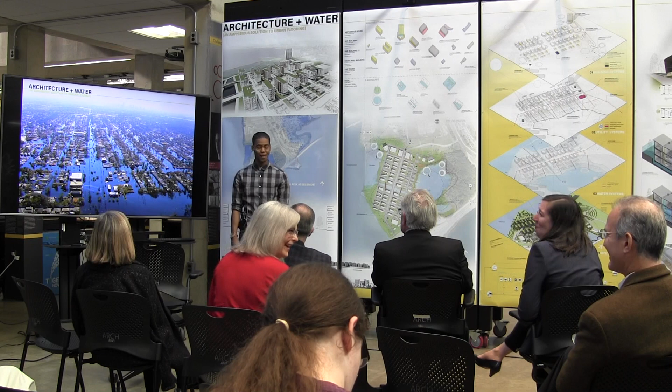So starting, my thesis is Architecture and Water: an amphibious solution to urban flooding.

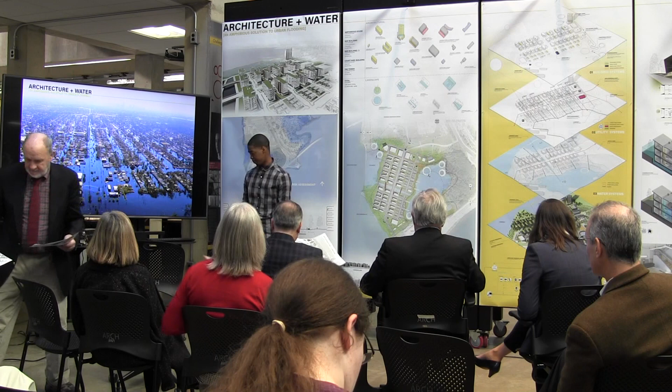Designs of a purely arbitrary nature cannot be expected to last long. This is a quote by Kenzo Tange, a prominent figure within the metabolist movement, and a key principle of how I approached my own design. Architectural permanence is very important, not only to the architect, but to the people who live in the buildings that we design.

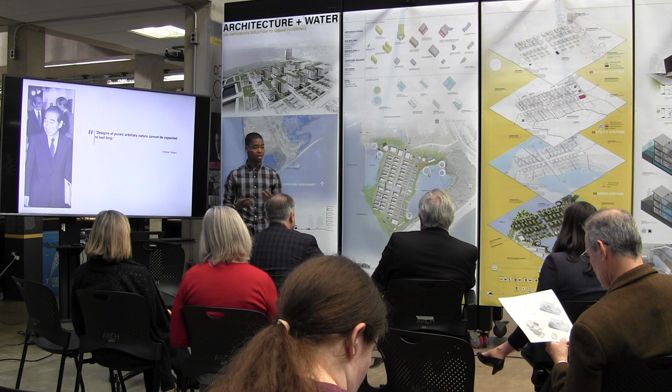One of the key problems that our architectural permanence faces is water. Water, when it's introduced to a building, can lead to mold, sickness, and structural instability. But it's also one that we are starting to find happening more often due to climate change. We often build buildings so that we can deal with this water and architecture duality.

So we build roofs to protect ourselves from water. We build downspouts to move water away from a building. But these problems are becoming more and more apparent due to climate change. Climate change is very real. It's happening, even though some people deny it. And it's causing too much water in some areas and too little water in others.

Climate change is causing sea level rise and flooding, but it's also causing things like the water crisis in Africa and other places, like specifically Cape Town, where they've limited the water supply on a daily basis for residents.

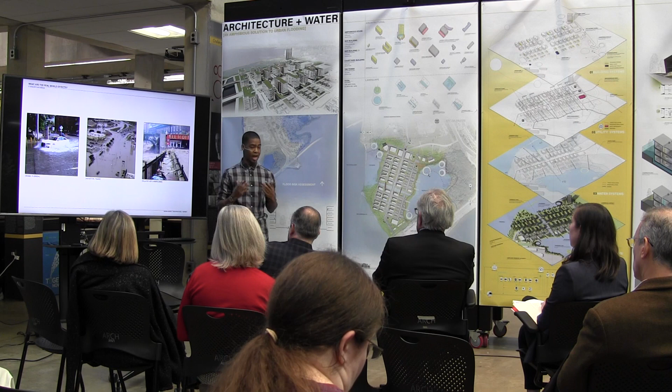They've started to raise elevations, invest in their wetlands and other pumping infrastructure. But that's not the only problem. In places like Houston, Texas, and Ellicott City, they're seeing flooding due to poor planning design, which is the cause of lack of permeability. And these effects are compounded by pollution, which mixes with the water and affects the entire water supply.

So we get these problems because we build close to water, but why do we build close? We build close because access equals value. When we build close to water, we have done so traditionally because of defense, mercantilism, activity, swimming, and all of these things. But the problem is that with sea level rise, we're getting more flooding, more storm surges, and more pollution.

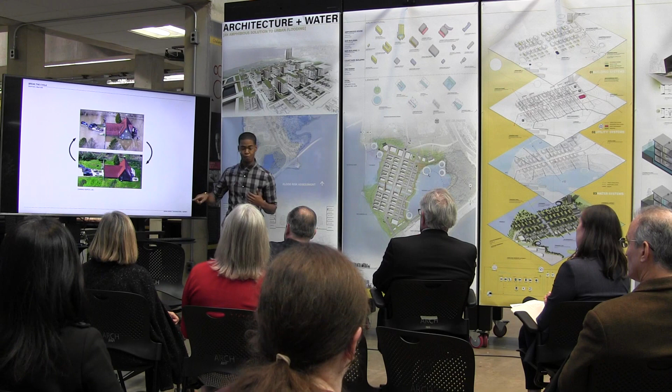Traditionally, what we've done is one of two things: rebuild or set back. We've run away from our problems, basically. So this thesis encourages the idea that perhaps one solution to these problems is creating efforts that foster resiliency and staying on these landscapes, embracing the positive aspects of water. Instead of this cycle of rebuild and rebuild and rebuild, we want to break that cycle, because these are solutions that aren't expected to last long.

Looking at a group of people who did attempt to solve some of these problems in one aspect or another, the metabolists who came out of the 1950s CIAM conference were led by Kenzo Tange, who I spoke about earlier, and they created these megastructures. This is the Tokyo Bay plan. They created megastructures that extended over Tokyo Bay, with plug-in modules attached to them, and civic buildings that ran through the center.

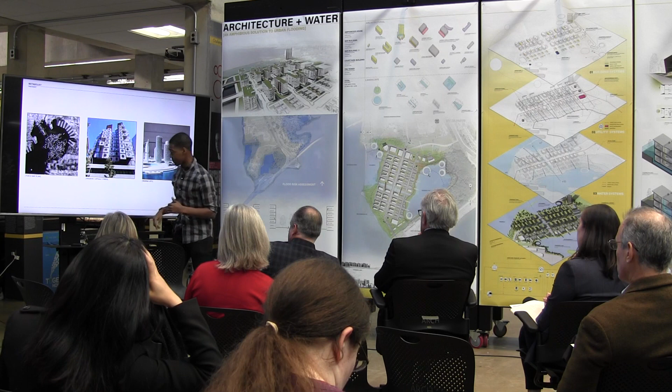Their probably most prominent design was the Nakagin Capsule Tower by Kurokawa. It saw the megastructure as the core space, with stairs and elevators running through the center and plug-in residential modules. The Marine City was an extension of the Tokyo Bay plan, in which we also saw vertical towers of modularity with inner rings and outer rings that dealt with water differently, some for activity and some for fishing.

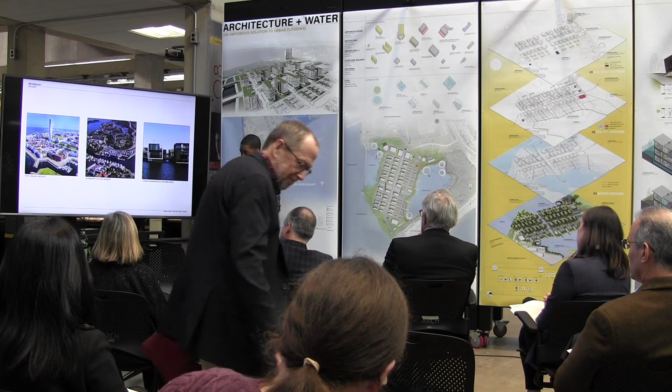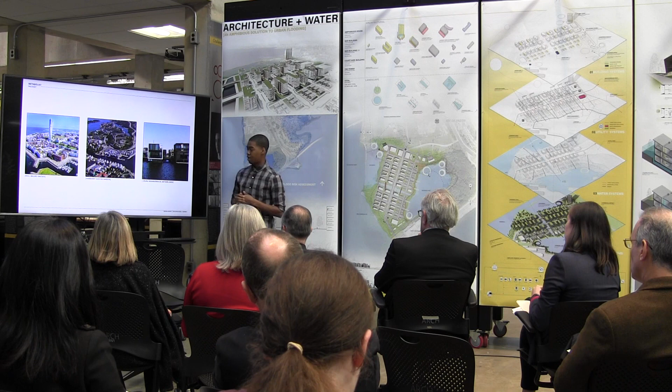Another group that's dealing with water in interesting ways are the Northern Europeans. The BO01 project in Malmo dealt with it interestingly by bringing water into the site and using it to foster sustainability. Hammarby in Sweden uses a cool waste management system of chutes to transfer waste, and IJburg in the Netherlands dealt with this at a neighborhood scale.

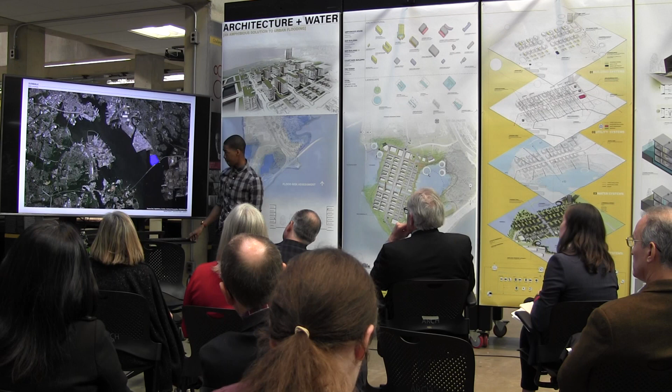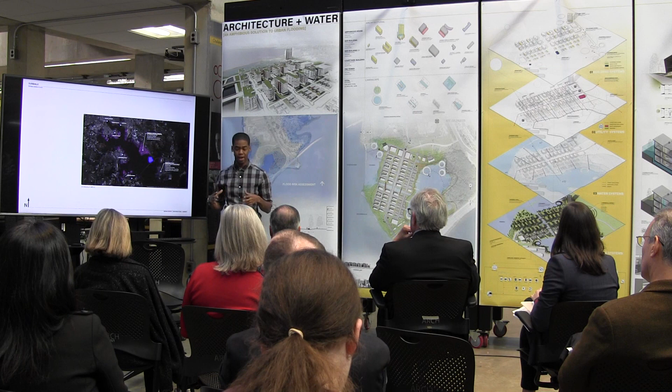So if you're looking at this, this is Baltimore. It's adjacent to the Dundalk Marine Terminal, which does 40 containers per hour and is one of the largest in Maryland. And Sparrows Point, which is set to bring in $2.9 billion in economic growth to the area through things like Amazon has a location there, and cars, and it's set to bring in over 17,000 jobs to the area.

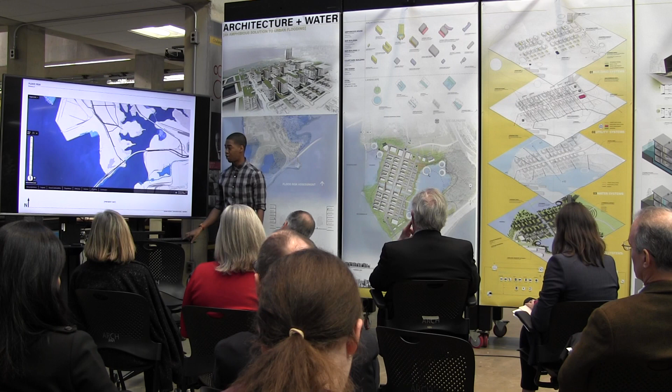But it's also dealing with a lot of flooding. So presently, it's fine. There's a neighborhood to the north of it, but over time, by 2100, it's set to take on about 5 feet of incoming sea level rise, and this will start to flood adjacent neighborhoods and the site itself.

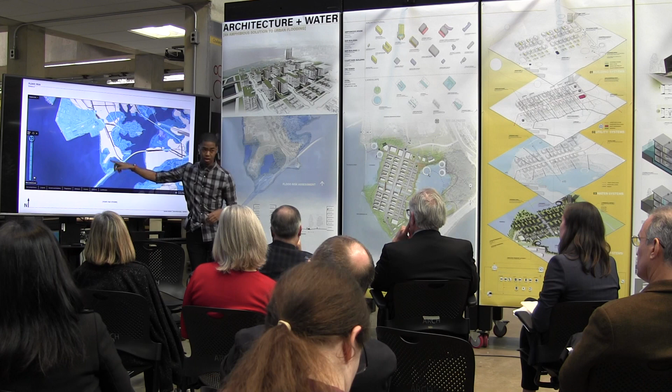By 2100, we're set to have at least one storm that will leave 10 feet of sea level rise to the area, taking over the entire site and leaving merely a spine. So this once again is the site, in context.

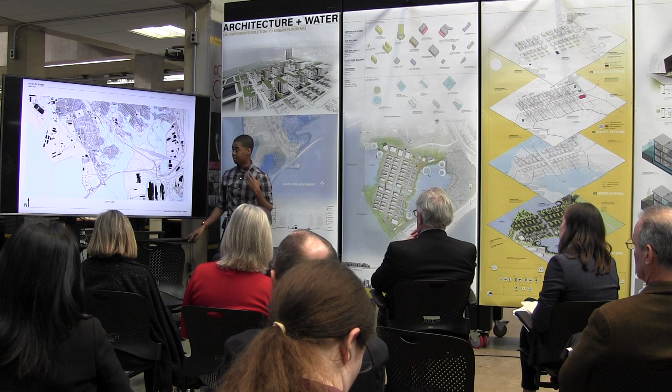When thinking about the site, I developed key ideas addressing how to design on the site and what I thought this thesis should be about. So the goals of this thesis were: one, to provide a safe space for people to live and thrive in flood conditions; two, creating infrastructure and water-sensitive urban design; and three, show the community how they intersect with the ecological system.

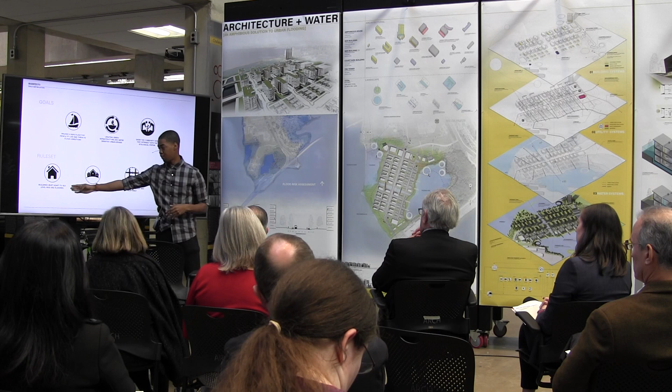To do so, I created a rule set, which is my manifesto. One, that buildings must adapt to sea level rise and flooding. Two, that landscape and architecture are one and the same. Three, that buildings are modular and adaptable. And four, that the building technology should facilitate these changes.

So with that being said, I'll take you through the boards and run you through some of how this design came to fruition. So this is the site and its flooding context.

It has one street, Breckenridge Drive, that connects it, and I-695, which runs through the Key Bridge. And so otherwise, it's generally isolated from other contexts.

When thinking about this design, I separated the goals into a kit of parts, much like the Metabolists did, to create a system that works. So I developed a system of buildings, architectural and landscape, that work in tandem with one another. Thank you.

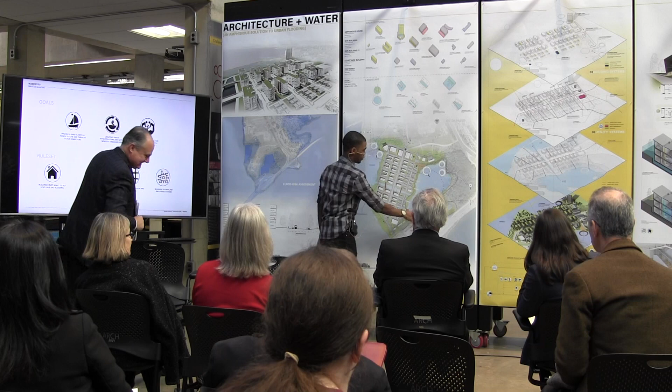So these all operate under the guise of an entire plan, which is 45 acres. So there's Riverside Lake here and a marsh here with a canal that runs through. And so the general areas are a commercial district coming in off of Breckenridge Drive.

You enter through a gateway. So there's two shopping areas here, you can see them in red up there, that flank the gateway and entry to the main site. Flanking that would be the large tower, which is the landmark of the site, and then high density towards the marsh area, and low density amphibious housing towards the Riverside Lake.

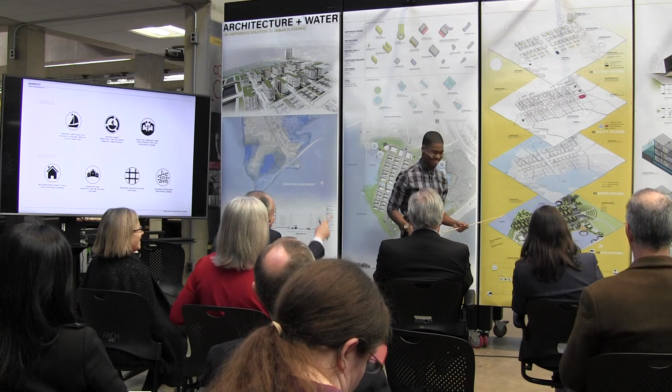So when thinking about the site and how these buildings, when thinking about the kit of parts, I thought about how they play into a system, much like the Metabolists. I developed a water system, which is based off of the typical evaporation, condensation, precipitation, and then collection. But then that feeds into the entire loop, which becomes the man-made cycle of collection and then cleaning into potable water, and then how individual systems within the building context work.

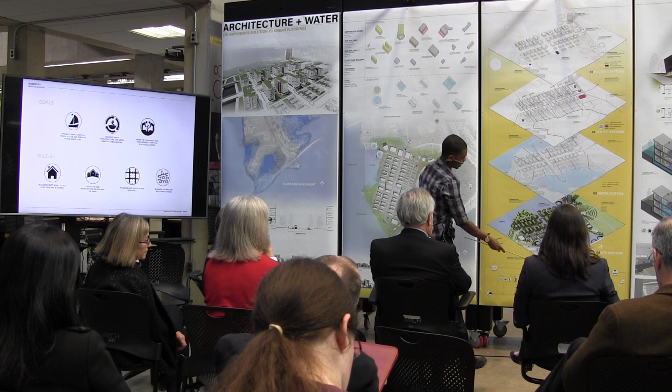So that would be how energy systems feed into other water systems, like, for example, an aquaponics center, which would have worms feed fish, have those fish be able to be sold, or how those fish end up providing for vegetables, and they can be sold as well. So that happens within what I call baths, which are akin to the harbor baths, and they are almost a fishbowl within a fishbowl of sustainable features that are included because of the isolation of the site.

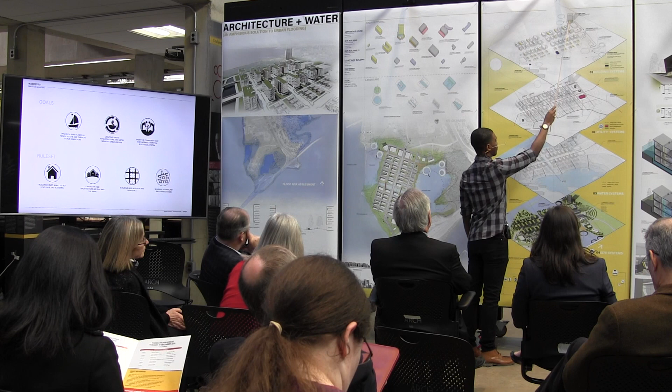So going to the building systems, I thought of how these buildings were in tandem with one another to collect water and to transport water from one area to another. The tower has a growing space with a pink lab that feeds into the gateway, and then the baths feed into an aquaponics center, which also feeds into the gateway.

Pump building facilities transfer water from the riverside lake into the marsh during heavy storms.

For utility systems, there's greenways that run south to north on the site, and it's treated very much like a garden city in the essence that private throughways go through the center, whereas public service ways happen on the exterior of the buildings. So this would be a public service way, whereas this would be private circulation.

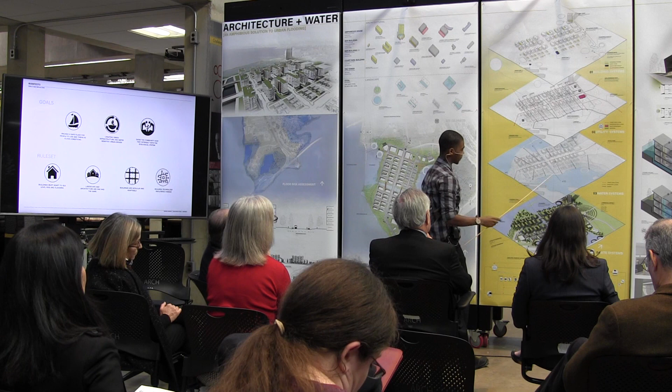Breckenridge Drive stays on the primary spine of the site and won't flood, whereas the others will. And this allows for flow from the Riverside Lake to the marsh area.

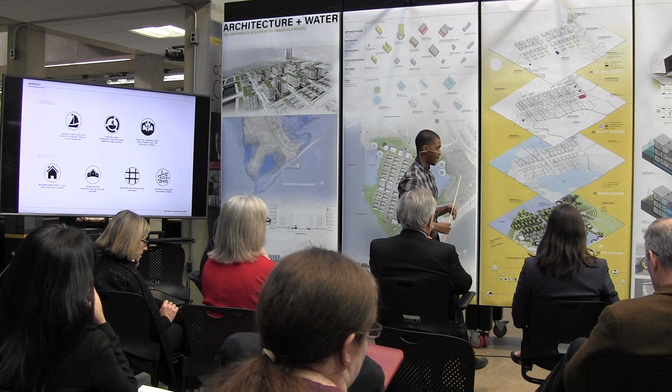The flow of water is very important to the site because it's about keeping the water moving rather than stagnant, because that's when you get problems with pollution and brackish water. So this led to allowing the creation of a boardwalk which runs through the site and provides activity and amenities along the lakeside.

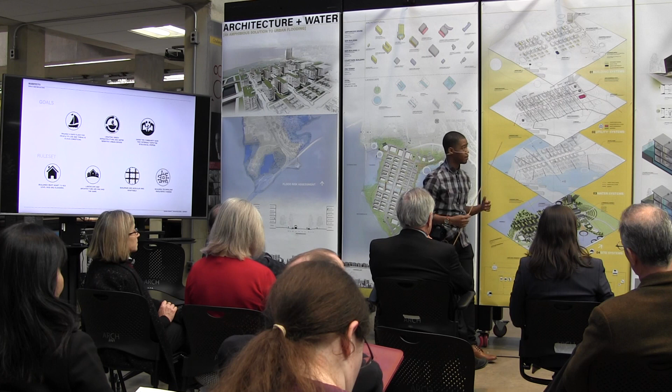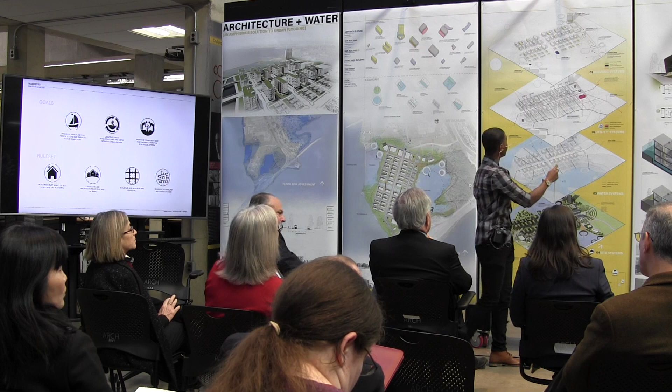Now we'll talk about the four scales of residential that I've looked into. So the first being the Amphibious House, which are here and along here.

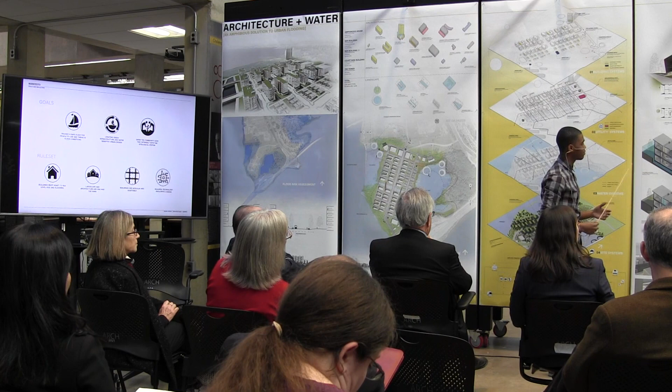So I looked at a precedent in Thames, and it dealt with using waffle slab construction to allow the building to lift over time. This contains a two-story unit and a one-story unit. So the ground floor repeats and is below, and this is one unit.

So this allows it to float. The waffle slab allows it to float during high flood periods, and there's a bridge, which is basically a sculptural transition space that allows for transition in flood periods to safety. Thank you.

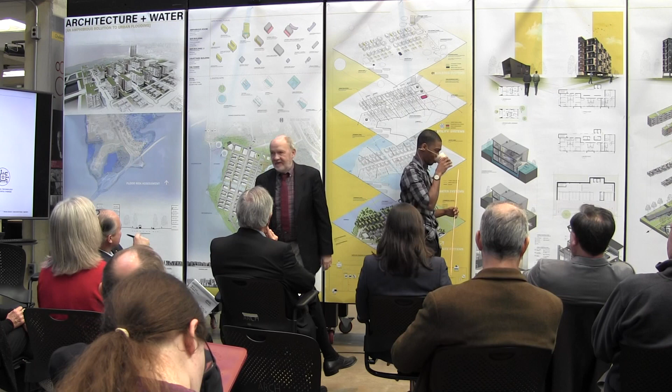Seems appropriate. It is. Getting dry up here. Get you through this.

This is a look at the interior space coming in through the living room, and the core is mainly all of the water features, and it's outbounded by a master bed and a study, which gets you outside, and a kitchen.

Then looking at the bar building, it starts a continuity of using shipping containers as a module, so it uses either 20-foot deep by 8 feet shipping containers or 40-foot length shipping containers. So that would happen, the 40-foot would happen there, whereas the 20-foot would happen here.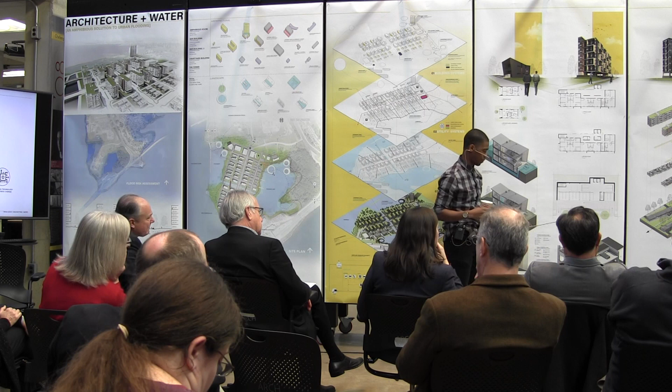And that allowed for creating this idea of modularity within the space. And it also allowed for a water unit where everything is compiled. So because this deals with water, the sink runs to the toilet, and then the toilet washes out the bathtub, or the dryer or the washer machine can run out to the sink and wash that out.

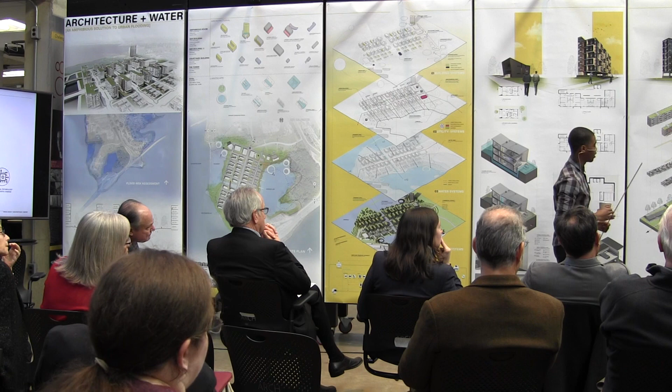Looking at the Courtyard Building, I thought back to Greenbelt and kind of this end facility. So you see these courtyard buildings running on the outside along the marsh. I thought of it as that Greenbelt where I'm redirecting and funneling views and pedestrians into a gathering space and looking outwards towards the marsh, where there's parking below, once again like the bar building.

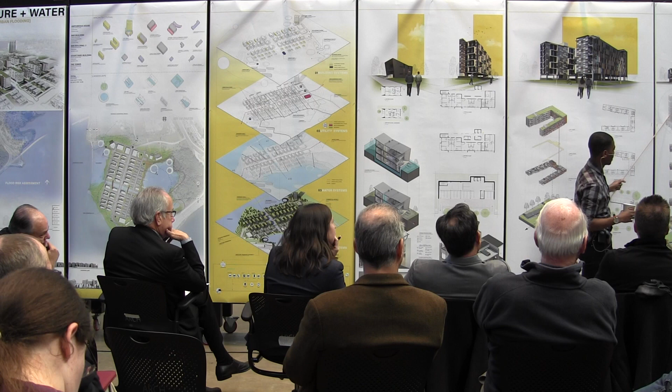And finally the tower, it has these grow spaces that happen within each tier. You can see it here, here, here, and there's one outside that all bring water in from the roof through hydroponic space columns that allow for growing, and that water is collected into tanks, and the growing material that the vegetables or what have you that's grown can be transported to the gateway tower.

So looking at entry, when looking at the building, I began to skew the main tower facade outward so that you can look outwards towards the water and everybody gets a view towards the water, much like this, fostering this idea of a garden city and public views.

And then on the lower levels, I created a modular system of units that could be used as vending spots that can turn to open or close. When they're turned one way, they allow for people to enter them, and when they're turned the other way, they're closed off to the site.

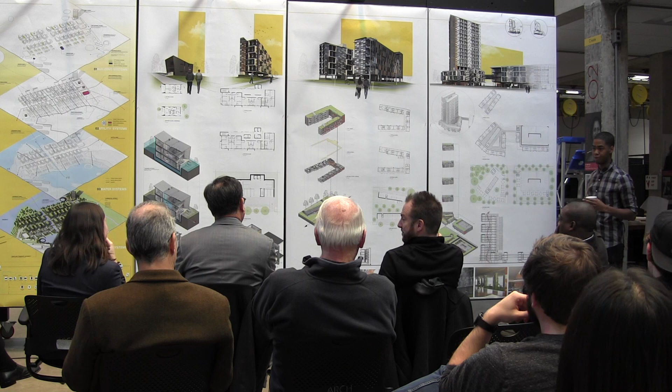So I'll open it up to questions, concerns.

A couple things. Is this on? No. Here comes help. Test. Technology. Test. Oh, it works. Test.

I went to school here a long time ago, and when I left, I felt like I had to go back to school. Not that anything was wrong here, but I did so because I thought, at least from my way of seeing the world at that point, the issue for my generation was urbanism, contextualism, understanding how modern architecture had failed us in that way.

And I think this is the issue for your generation. I think anybody who enters this profession at this point and doesn't realize it's about things like this is really not understanding what the world is about. So I think it's a really good thing that you took this on.

My understanding of your project is you're not really trying to keep the water out necessarily. Right, no, you're letting it in. And you're saying once it comes in, you're going to deal with it. Well, that is one way of doing it.

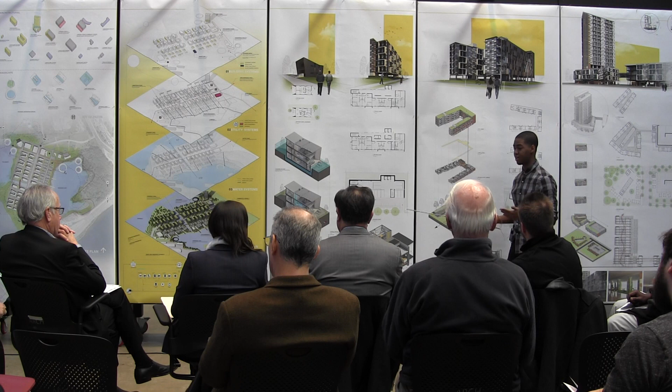So how I viewed it, at least the scope of the project as I saw it, that was a little bit beyond. There's a lot of looking forward progressively until there is no site at all. But how I saw it was building up to a certain point so that I didn't have to deal, much like Miami's doing, with the sea level rise to that amount, and then dealing with flooding and the effects of keeping that water moving consistently throughout the site so that you don't have a buildup of brackish water, keeping areas like structured parking away from the main flood areas, and then composting and grow areas and the commercial at that core, because who would want to have a shop at a place that will flood?

I want to say I really appreciate the diagrams of your strategies on the top left, I think those are really nice. I like what you're starting to do with the connection of the water to the lake here, and we talked about maybe the idea of more canals. It looks like you're starting to develop those, but I wonder what people can do there. I think there's an opportunity to differentiate between those different piers and what might happen on them. I wonder where the boats are, where the kayaks, the canoes, like you're talking about what happens when it floods, how are people getting around?

So I was thinking that the marsh after a time will flood, and that's why I was thinking that people start to make that connection. I haven't fully developed that aspect yet.

I think the idea of the floating structure is really fascinating, and I'm sure, like you guys said, you're on a journey with a lot of projects like that. There's a lot of technical issues to a building that moves, but it's a cool idea. What I really like is how you've started to develop that stair, that sculptural stair, and that could be a really interesting kind of marker of history. I imagine the water receding and people taking a Sharpie and saying, this is where it was in 2018. And that sort of marker, that remembrance of what it had been, that's cool.

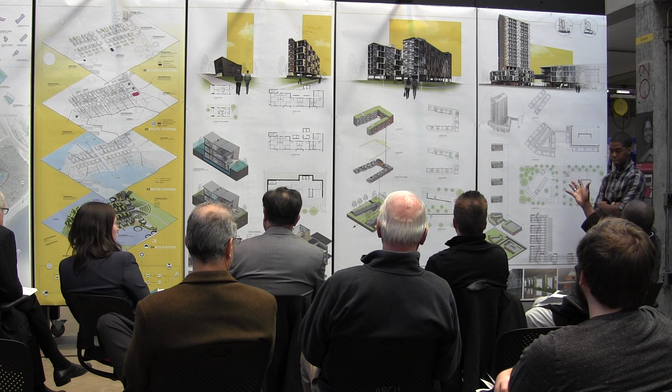I think idealizing it—that you can raise these houses up and create this no man's land at street level 99% of the time of the year, but in that one chance where you get that 100-year flood, then your project comes into fruition and realizes why it was created—I don't think that's a correct strategy of approaching this project.

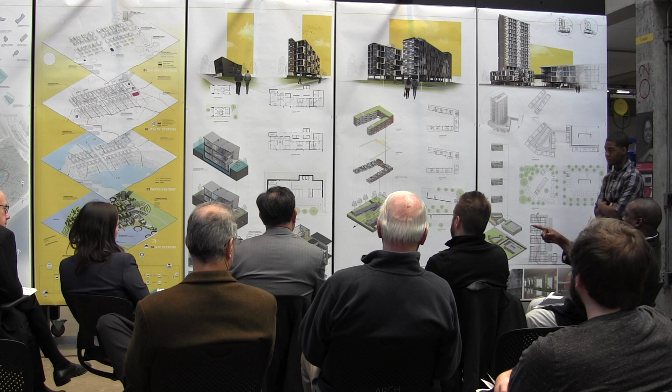I think you somehow missed the mark. For example, when I look at your urban design, I'm like, this is why there's flooding, because you have massive runoff. When you plow over land and create asphalt—look at Ellicott City, whenever there's flooding it's because developers keep building and paving over land, so that when there's a small amount of rain, it floods the waterway and floods the neighborhood.

Which would be the right solution, as opposed to saying, 'I'm going to just build more and build them taller so they raise their skirt off and water goes underneath them.' I actually think if you had focused on the pontoon housing as a solution for this smaller, granular scale of urban housing that has to deal with flooding in case it happens, I'd find that more valid.

It might sound antithetical to the reason of the thesis, but I think if you're approaching a project like this, you have to zoom out and ask yourself these hard questions. Because when I look at your planning, it's like, wow, that's tough.

Are there ways you can create green spaces that could help temper things? Because with the housing you've built, even though you're showing little patches of green, it's going to be pavement everywhere. So when it does rain, it's going straight into the bay, and it's going to flood everything.

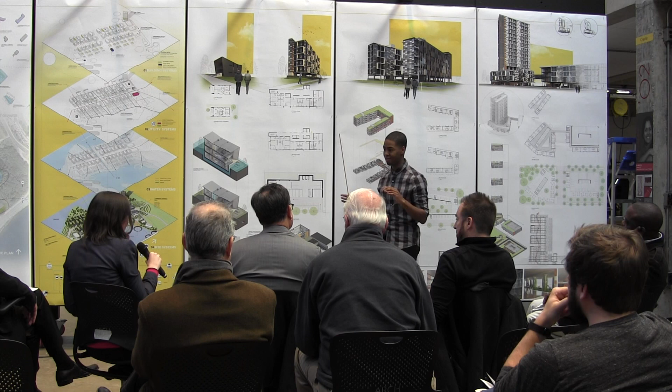Well, one way I attempted to do it was in these water masses that happen and protect from storm surges. And then there are other efforts that would happen along the coast. But I had a whole rule set where people don't park close to the water, they get emissions tests if they're visiting, all this smaller detail stuff, but nothing architecturally. I think I could push that probably more.

I think if you had a civil engineering expert on your team, exactly, yeah. I think there's an argument that the green space there could be used to help mitigate some of the floodwater.

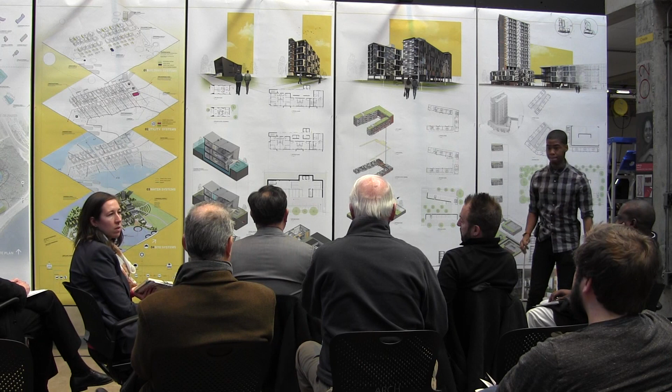I want to underline the fact that this illustrates what theses are about, which is speculation. I think it's terrific. I think there are some legitimate observations to be made about the urban design. You have lots of places to put monuments, and of course all those monuments are going to be vertical water spouts, right?

We have learned that sea level rise is a huge issue in Maryland, and it's much bigger than is being addressed politically. I had a student in a spring course last year who's running for public office in Wicomico County, and he is seeking university assistance in dealing with the agricultural implications down there. But you probably know that Dorchester County is the poorest county in the state, and the third rail of politics in Dorchester County is relocation. And yet that's exactly what's going to have to happen in order to solve that problem. Because if you look at the Department of the Environment's maps of the Eastern Shore, Dorchester County basically disappears.

So I would have welcomed some more strategic studies about what happens to the water flow through here. And you know that there's only one rating system which calls for net zero water, and that's the Living Building Challenge. So the infrastructure necessary to get you to net zero water as a community is really an interesting idea, and you're well on your way to doing that.

So I hope more students in this school will look at this issue because places like Dorchester County really need help, and they're not able to face the problem because they're impoverished. The only asset they have is their property, and that's what's disappearing. So thank you for putting this card up on the table.

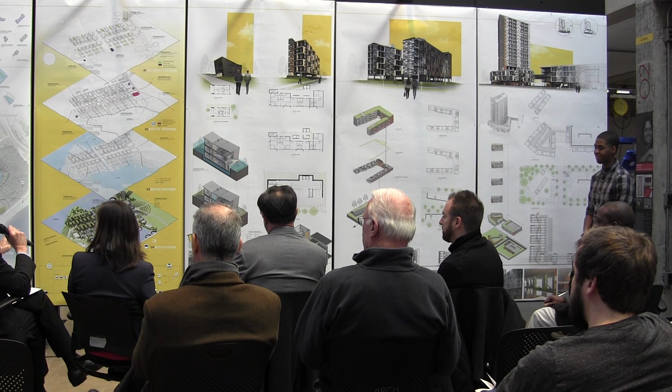I don't want this to sound like I'm not concerned about climate change. I do think there are times, not talking about your project specifically, where people simply build in places they shouldn't build. You look at a flooded site and wonder, why did you build there? Why put a house or an apartment building that close to the beach? So I hope it's not just about what you do with the water, but how you rethink where you build.

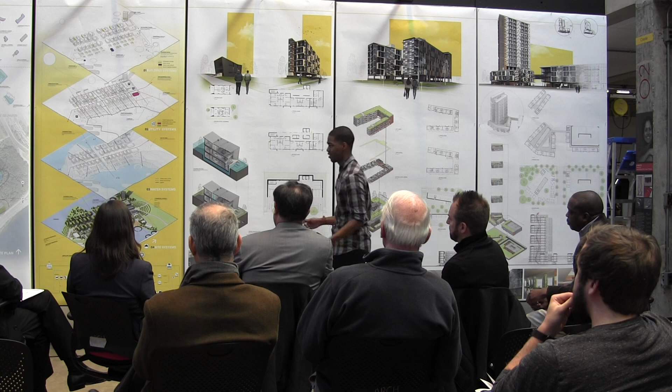So do you have any count as to how many living units you actually have in this entire development? It's about 30 units per acre, like a typical garden city. So I have 1,342 units total. That's a huge project, a lot of people.

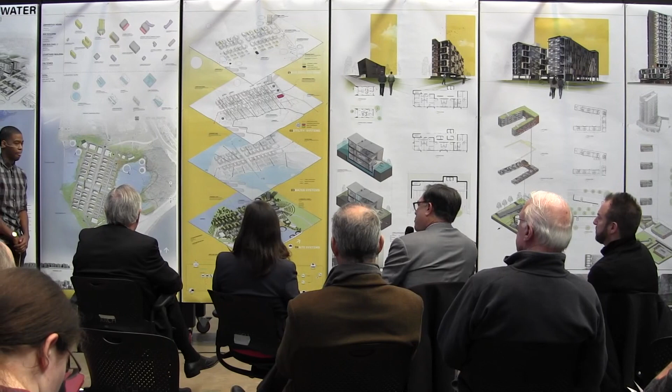Like a lot of the critics here, I applaud the thesis behind this, putting a serious problem and how the building world responds to it on the table for everybody. One of the problems when you start out with a big idea is your project becomes about how does this project think, as opposed to how does this project feel. And I'm just a little troubled by the environment you've created.

I faulted some of the earlier projects as having too much going on. Well, in ways you don't have enough going on. Every house is the same, every mid-rise is the same, every courtyard is the same, the high-rise, it's all the same aesthetic. It's blank walls, dark colors, effectively acres of parking lots with buildings on top of them. It just doesn't feel like a pleasant place to be. I applaud the thought behind it, but as you move forward in your career, I encourage you to think about actually using what you're designing and how it feels.

So that might be a problem with my intent. My original intent was this bridge concept of safety above, water below. When I envisioned the original aesthetic, I was playing around with just letting the place flood and dealing with sea level rise, and then it became about making it resilient in the face of flooding. One of the original aesthetics was keeping views throughout the site at street level, using the parking below as a means of keeping all the valuable stuff out of the ground plane, but also allowing a pedestrian at street level to view straight through and see an expansive landscape from the ground floor.

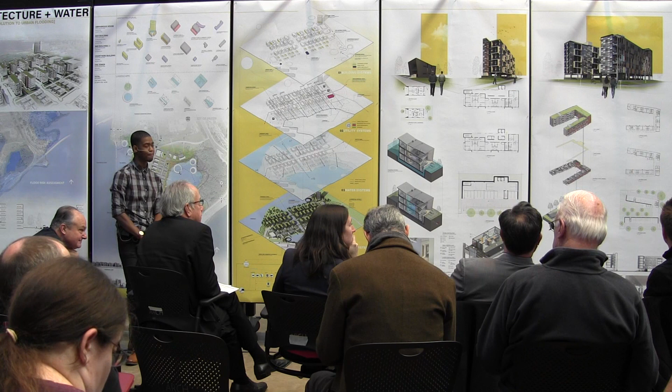For example, in the single-family amphibious solution, when water does come in, this is how the architecture deals with it. When I look at the high-rise building and the others, it's okay if that's the way you choose your site planning, if that's what the developer wants in terms of density here. But to your thesis of creating amphibious type architecture and structure that solves the problem when the flood does come, once every 100 years.

I would love to see that populate your perspectives, and have you elaborate and diagram those out and speak to us about that. I agree, the simplest solution is your diagram right over there. You just build on that high ground. Just save them a lot of...

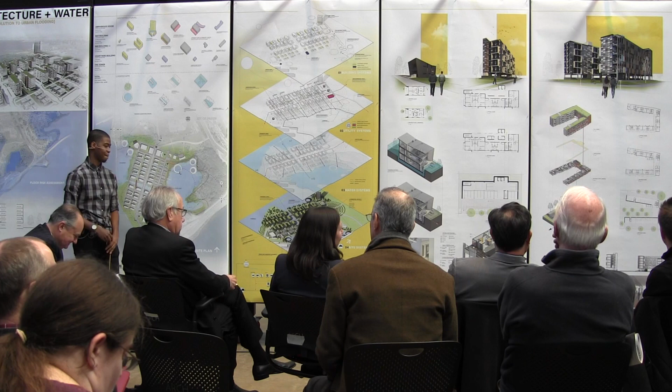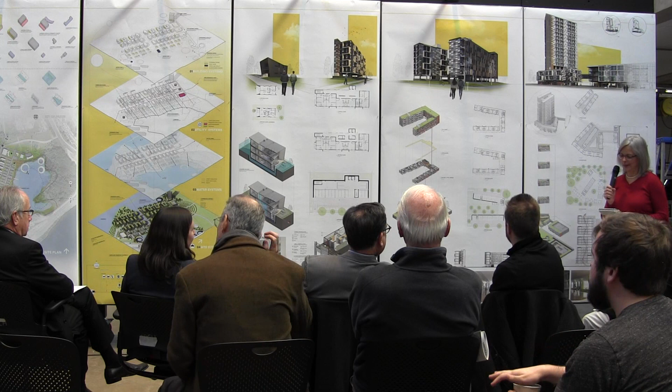Bryan is an intellectually curious person. He's unusually open to critique and exploration of alternatives. And I think at the end of the day, he's kind of a visionary. He's full of ideas, he's kind of an idea factory. And yet he has a facility with all kinds of drawing. He's a beautiful freehand drawer, and I'm actually surprised he didn't show more than the 2 tiny drawings, but he could probably fill this wall again with just the process.

And as you can see, he has a great facility with computer drawings as well. I just want to reiterate that I think this was a huge undertaking. And that's also very Bryan, that he's ambitious and fearless in his very quiet way. And he sees the connection between things that a lot of folks do not. And so I think that ability to see, or to begin to speculate on how your design career fits into this larger picture of this huge subject of climate change.

And I'm all about going upstream as far as possible, cutting the source off at the knees, trying to avoid having the problem, or to do as much as we can not to have the problem. But let's face it, we have the problem. So wherever you attack it, and I know this is such a thorough investigation, such an ambitious one, there's so much thinking in here that we didn't get to talk about today. But as far as not contributing to the problem, being net zero, and dealing with surfaces that really are quite permeable, on down the line, as a set of ideas, I think it's going to carry you through your career. It's probably worth a few careers' worth of material here.

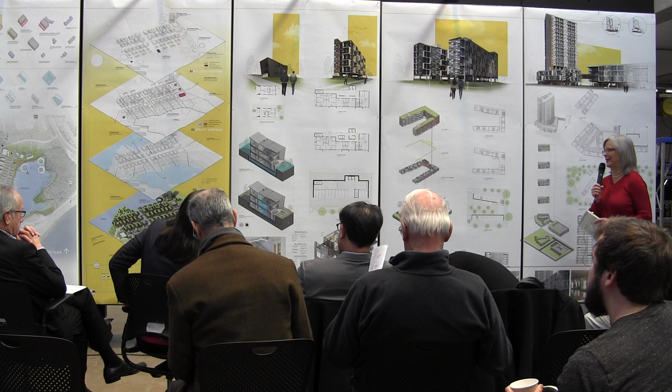But I just want to say what a joy it's been working with you, and to congratulate you on it. Thank you.